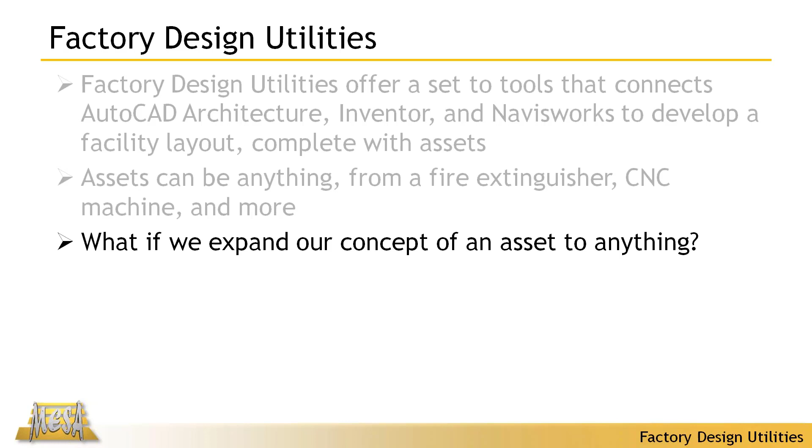So again, the assets can be pretty much anything. You're going to get your building, you're going to get your assets, which are pretty much everything else inside. And I've seen people, fire extinguishers, CNC machines, and more. But the main point of this topic is, what if we expand the concept of an asset to anything we could possibly imagine? Any product we make, anything, even a component of a product we make. So that asset may be a row of chairs in a concert hall, a checkout stand at a grocery store, shelves and racks in a retail location.

So lots of different ways, and it begins to make you think that the word factory doesn't really mean factory. And actually, one of the titles I was considering for this was unfactoring factory design utilities, because we're changing what a factory means in terms of that. And I've actually even heard other folks say that they feel that the product isn't really properly named because there's other ways to use these tools. That's one of the main reasons I want to share this topic with all of you, because you might be thinking, well, that's factory. I don't have to deal with the factory. But there are other ways that this can be helpful.

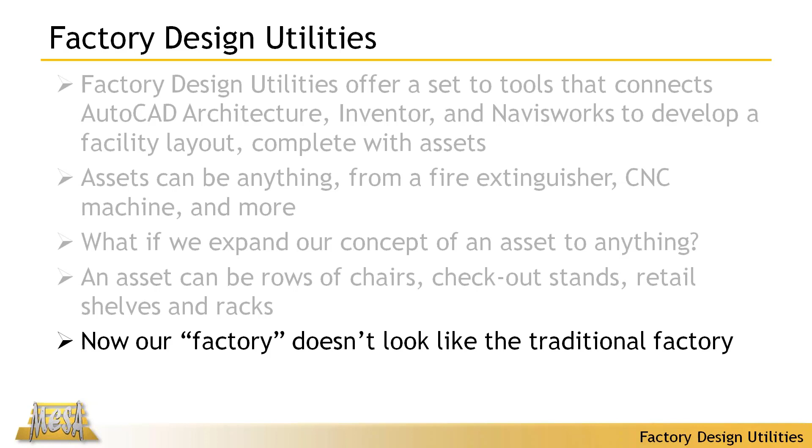So let's take a look at a couple non-factory examples. Event planning. If I'm going to be putting on the Winter Classic at Heinz Field, I've got to figure out how to put a hockey rink in the middle of the football field. There's all the equipment that goes into making the ice, all the pathways that the skaters and other people are going to want to use because they want to protect the field as best as possible.

So some sort of event like that, we could create the platform that the rink stands on as an asset. We can create the hockey rink itself as an asset. We can develop all those handrails and all those pathways and develop that.

When I thought of that, I also thought of, okay, well, PPG Paints Arena. They sometimes have concerts down on the arena floor. You've got to figure out where the sound booth is going to go. You've got to figure out where the rows of chairs are. You've got to figure out how many chairs you can fit on that arena floor. And so you want to know these things before you even begin selling tickets.

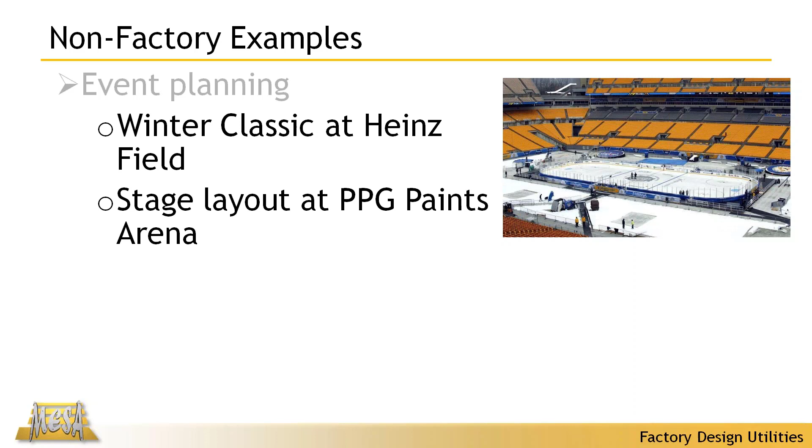So this type of layout, and maybe that even changes depending upon who's coming to town. PPG Paints Arena has Disney on Ice and those types of things coming as well. So each one of those requires a different layout. And Factory Design Utilities is actually a way to kind of figure out some of that stuff.

And then another one I thought of is laying out a retail space. We've got a building and we've got to figure out how the retail space is laid out. And this may not be something that most of you would think of, but this is another way to utilize these tools. And then one other one that was kind of way off the map, or maybe getting a little bit closer to what some of you would be doing, is the configuration.

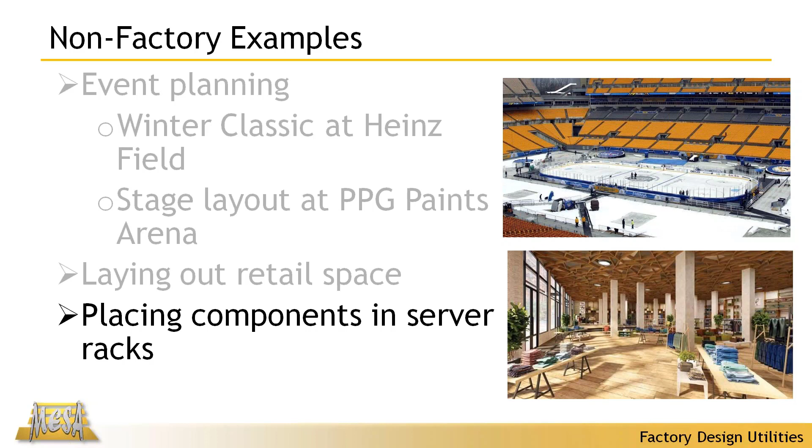Some of our customers out there make server racks, the cases that go into that. And some of them even supply, sell and make the components to go in there. I was thinking about how a server rack has so many slots, and you basically need to figure out how each one of those components fits in there, and some can take up 2 slots or 2 rows or 2 spaces, some take 3 or 4. So just even figuring out the spacing there is another possibility.

So let me do 2 demonstrations. I actually had one, and this one here is kind of a secondary one, but I thought it definitely demonstrates, but it doesn't really leverage all the tools. So I want to run through 2 here.

So the first one is, I like the idea of the Winter Classic. That really speaks to me as a hockey fan, and I know a lot of folks that are our customers are big hockey fans. So I wanted to incorporate this, and it was a very good example of event planning, a very non-traditional factory type setup. So I want to get into this one here.

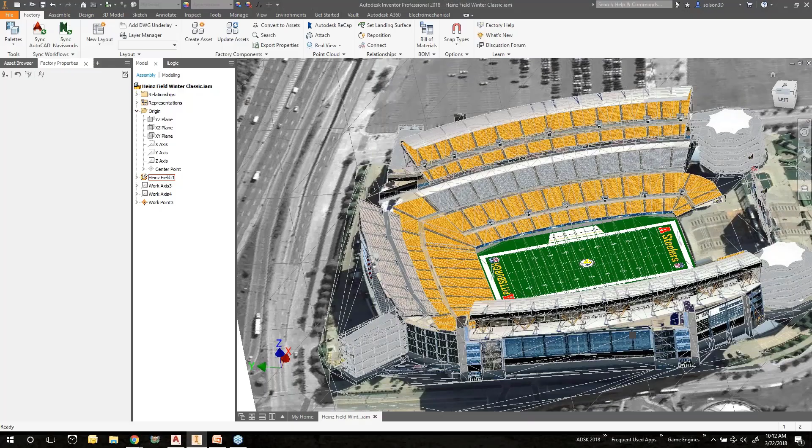So I downloaded off the web a model of Heinz Field. So don't think I did this. This is something I downloaded off the internet of Heinz Field. It even has some of the area around it. The Factory Design Utilities creates this big floor. Everything that we have has a landing surface, and by default, the landing surface is going to try to land on the floor.

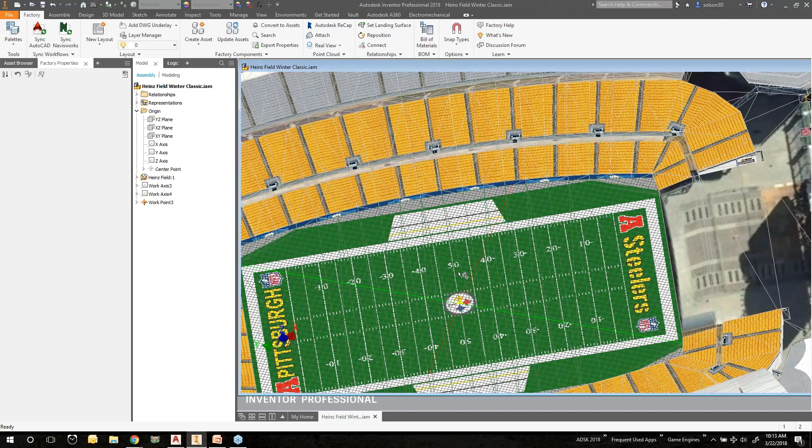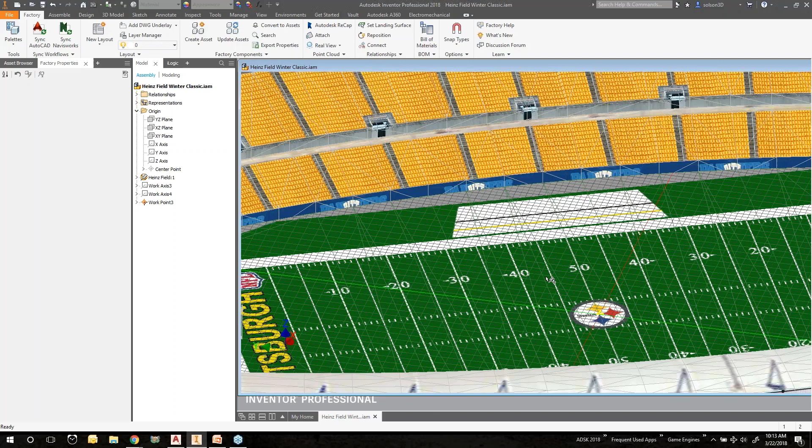So one of the things I had to do here is initially I had to push this model a little bit into the ground. That's why you're seeing the hillside come up out of it, because I actually have it just about 8 inches below that surface, because I wanted everything to land on the field, which wasn't the bottom of the model. So you can see I have my model here. What I'm going to do is go over to my asset browser.

So all these assets, some of them are system assets that are preloaded that come with the software that Autodesk creates, and they're very generic. Those work great in some scenarios, but in some scenarios we need to make up our own, so I have developed my own assets for this particular project.

In my event planning user assets, I have this block, which is the platform the rink would sit on. So I'm going to left click and drag that into the window, and go ahead and set this up.

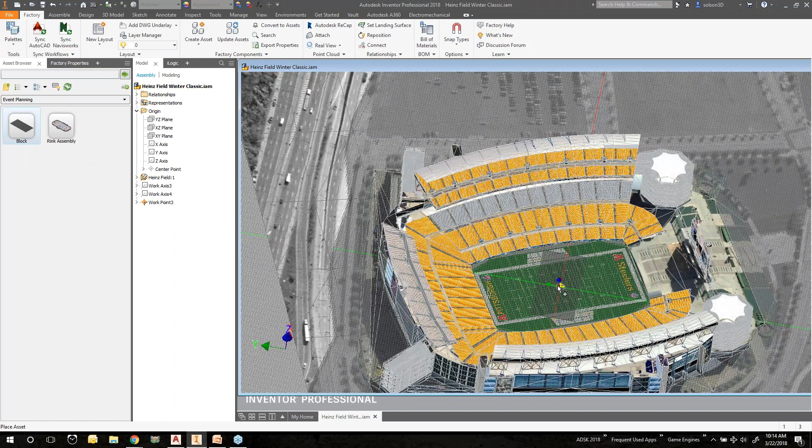On this origin point here, let me zoom in. So here's my origin and where I want that to sit. Once I place it, I'm going to get these coordinate systems here, just taking a few extra seconds to load that and create that. Once I have that placed, I can then position it.

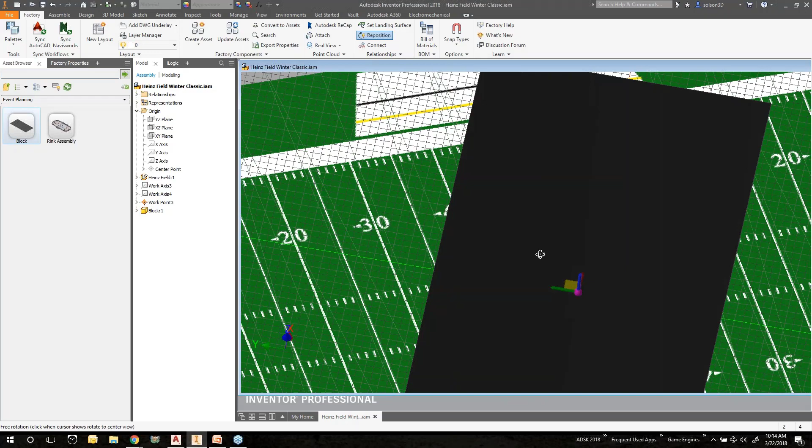It's going to by default land on the floor because it's an asset, and the assets have a floor definition in them. Obviously this is not the way I want the rink to be running, so this coordinate system here allows me to rotate or translate this object in one of those directions.

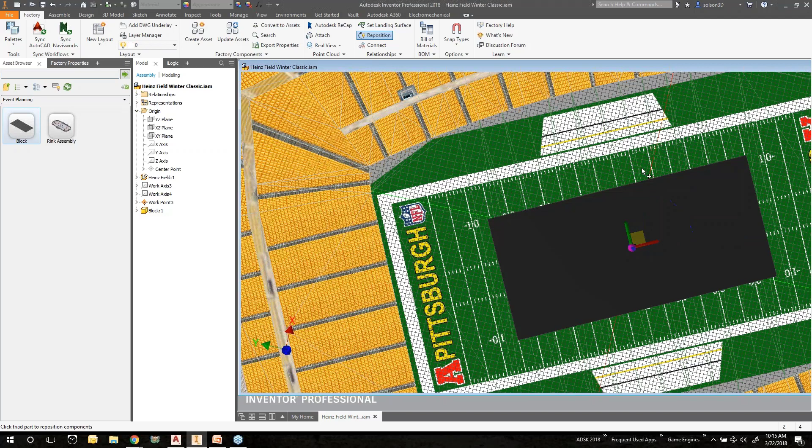Let me orbit this around here, try to get this thing kind of running parallel to the rest of the stadium here. Let me get this window maximized. There's a little bit of a pain in the butt there because that window wasn't quite maximized.

So now that I've got that, I'm going to right click and say done, and that asset is placed. So I've got that platform now in the middle of my field. Now I want to put the hockey rink there.

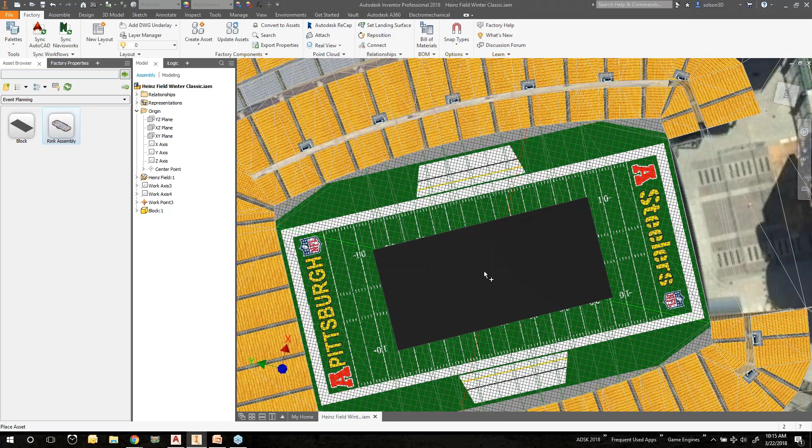So I'm going to bring the hockey rink in, left click and drag it into the window. It's going to have to generate the assets. That's what's taking a couple extra seconds, is creating a part file for me.

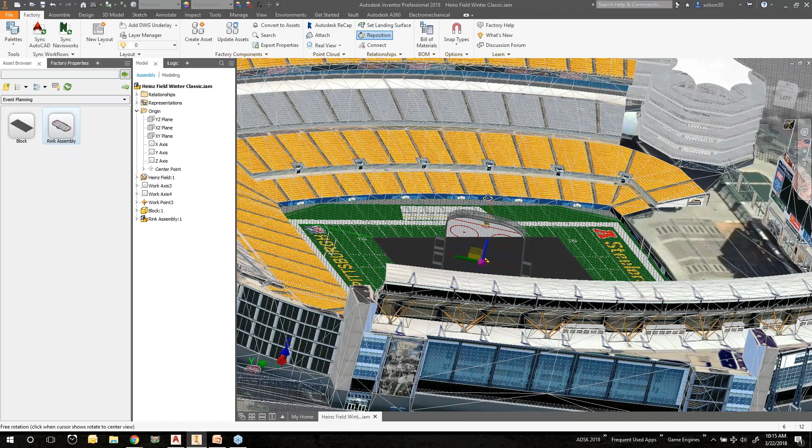I'm going to try to locate that center as best I can. Now, one thing I did on purpose here is the hockey rink's floor definition is going to have it land on the field, not on the platform. Not a big deal, that's where I can use these coordinate systems to grab this, and since I know I made the platform 12 inches tall, I just move it up 12 inches.

Now I obviously want to rotate it, so I'm going to rotate it and get to a top view here so I can see what I'm doing. What's on the left side right now is essentially the benches, and the right-hand side of the ice is the penalty box area. That looks like I've got it pretty well centered.

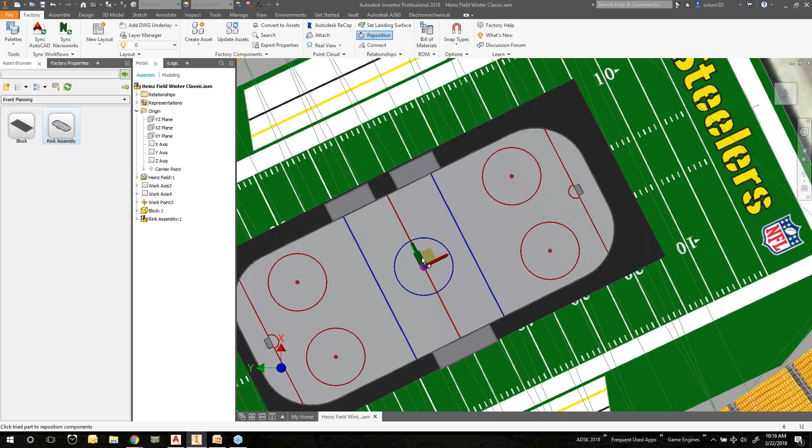If I wanted to, I could slide it in this axis just a little bit to make sure it's centered up. Realistically, that platform probably needs to be just a little bit bigger, but I kind of just left it as is for sake of what I'm doing. So there, I've right-clicked and now I'm done.

If this is really an event I'm planning for, I could start developing the handrails and the pathing and everything like that. I want to get to a different scenario though, to give you a better idea of how the tools are going to work in general. This is a good example, but I don't think it really sells or conveys all the tools here, so let me quickly save this and close it out.

All right, so I'm going to close this one. Actually, while that's working, I'm going to go over here to AutoCAD, because I want to show you the scenario I'm going to set up here.

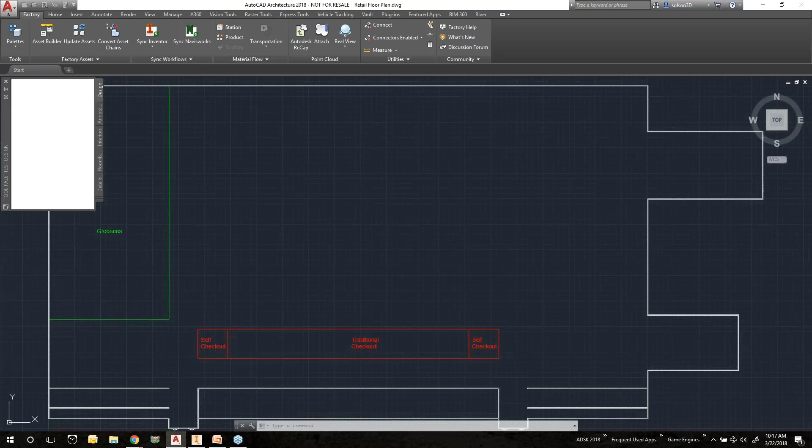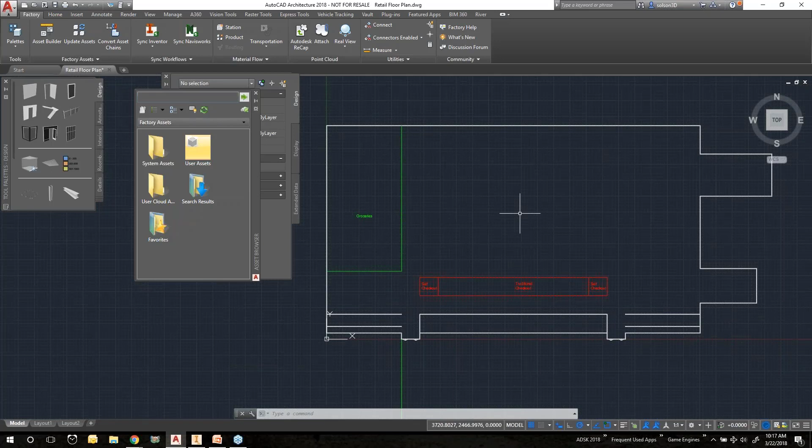In this scenario, I have a floor plan of a retail space, and I tried to find one online. I couldn't find one that really fit the way I wanted it to, so I created a very simplistic one here. This is a rough layout of what the local Walmart in my area looks like, probably the best retail space I could think of. You can see here I've got all the walls, I just threw a couple doors in there, and I have a self-checkout area that I want to lay out.

So this is an AutoCAD file, really nothing just yet, I just drew a bunch of lines and everything. I'm going to close this one out because I want to use this file as the basis of a layout in Inventor. So I'm going to stop right there, close that one out, and go back over to Inventor.

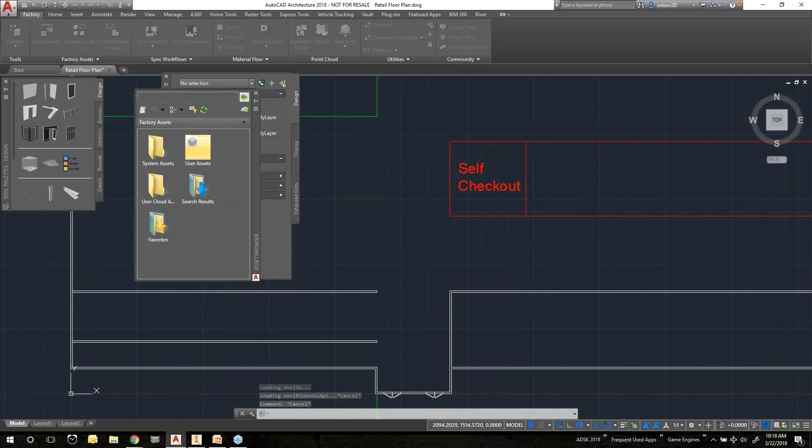I'll close this. So now here I have a Factory tab in AutoCAD. That's because I have installed the Factory Design Utilities, and you can see there's layout, create assets, projects, etc.

I'm going to go to new layout, and you can see I can create a new layout from an AutoCAD DWG. I'm going to do that. That's the file I just showed you, and I want this to be the basis of one of my layouts.

So I'm going to go into my workspace, find in my retail folder where I have that DWG set up, and go ahead and say open.

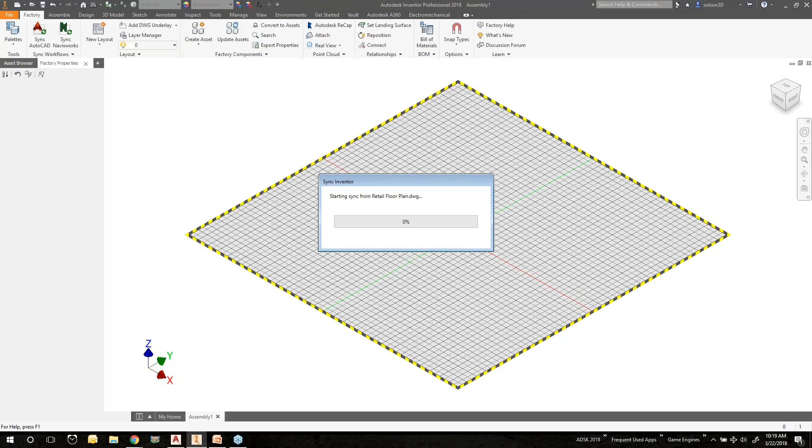So it's going to generate that DWG. It's actually going to create basically an assembly here for me. You can see at the top of the screen I'm getting Assembly1. It's building an assembly from my template, and it's going to bring that DWG in as essentially an underlay for me to work from. For some reason my machine always jumps back to AutoCAD once it's done, so now I have that. It's just really an AutoCAD drawing, nothing really special there.

So I want to bring in some assets and show you how these would work in a little bit more of an example that would be maybe a little more like a factory layout, while still sticking with our theme of not actually being a factory. So I have a retail set of assets here.

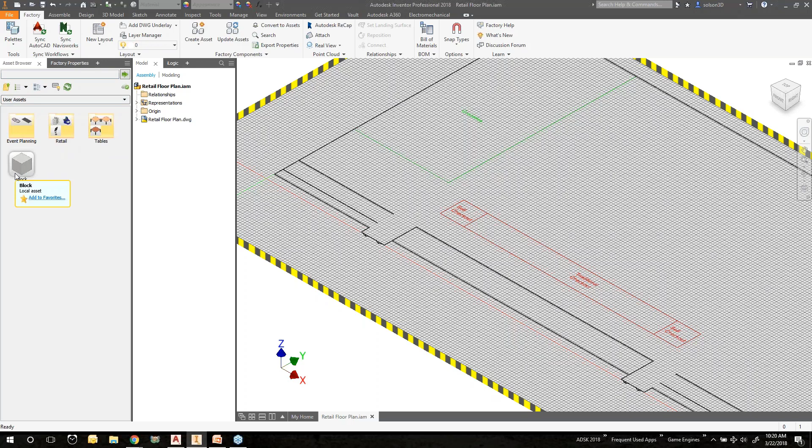Actually, I want to start with the regular system assets. I'm going to go back up here at the top and show you one of the system assets that would probably make sense here. I want to go to the safety equipment folder and put some guardrail around my self-checkout area, to create some fencing to keep the customers flowing through this area in the proper way.

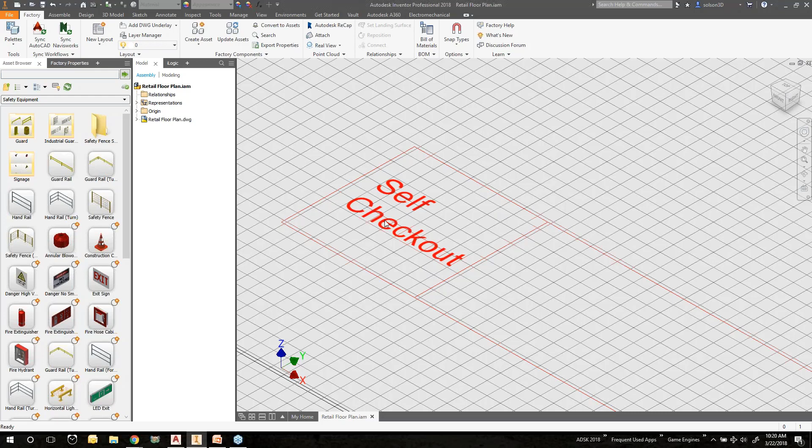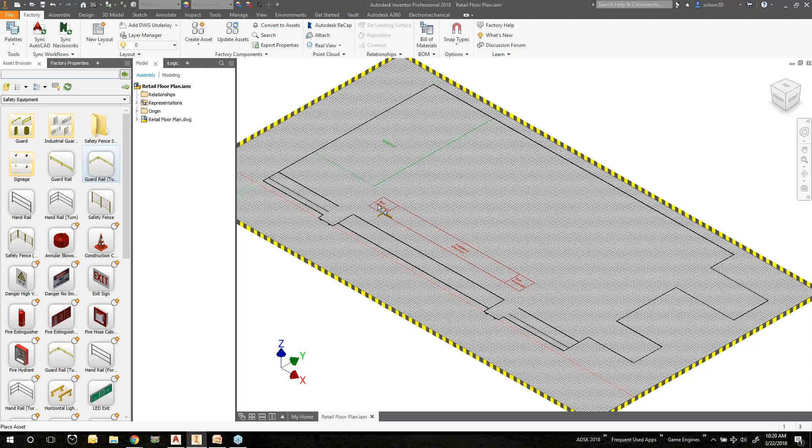So I'm going to grab this angled guardrail, left click and drag it into my window, and snap it to this AutoCAD file. It's going to want to rotate, so I'll allow it to rotate. I'll grab that arrowhead so I can rotate it 180 degrees, and right click and say done.

So you might be thinking, okay, that's great, but now do I need to put more in there, another section or whatnot? I don't necessarily need to. One of the great things about a lot of these assets is they can be left with key parameters that I can edit on placement, or I can make it more like an iPart with different configurations that I can drop in.

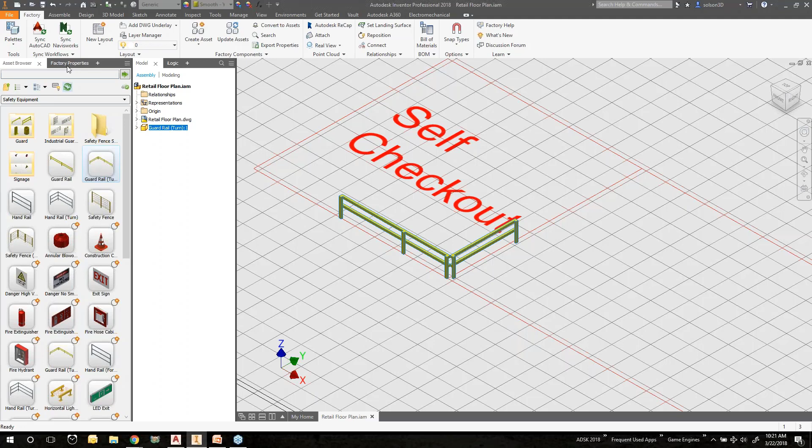So in this example, if I pick on this fence and go to my Factory Properties tab, you'll see that I've got an angle, a height, a length, and a turn length. The turn length is basically this leg over here. So I'm going to go ahead and change this parameter to 360 inches, or 30 feet, and you'll see that this leg over here will change.

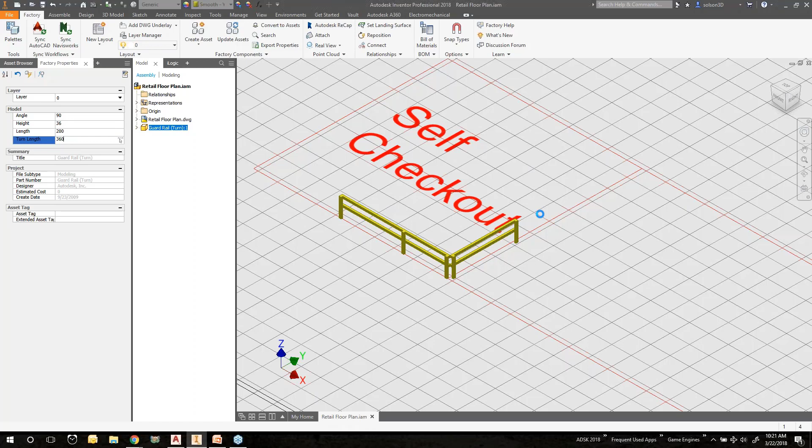Just taking a few extra seconds here, my machine must be working slow for me today. So there you can see it stretched that out, and there I have that occurrence.

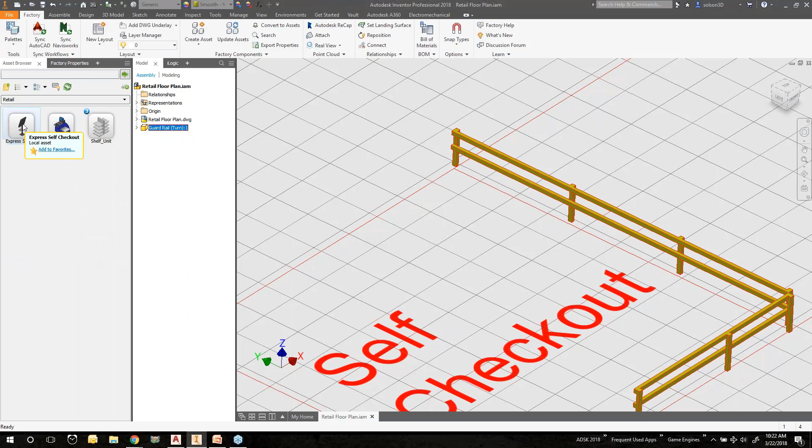So what I want to do next is bring in one of my authored assets. I'm going to go into my user assets, and I have some retail ones. I've noticed that a lot of self-checkouts now have more of a kiosk than the old setup, so I modeled up one of each. I'm going to go ahead and bring this express self-checkout into my model.

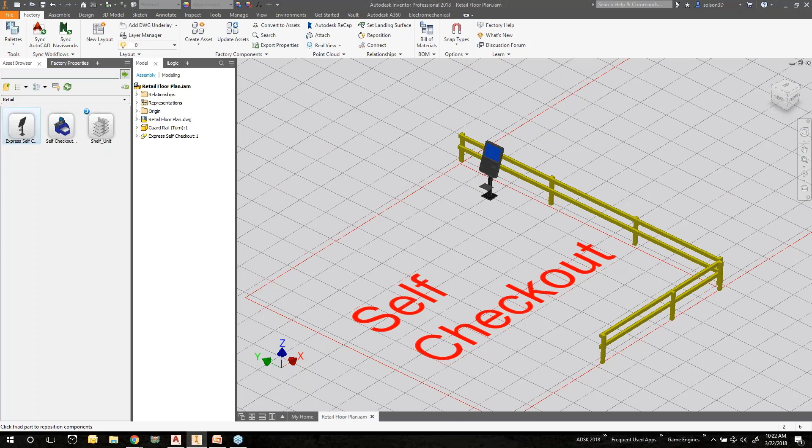I'm going to drop it right about there. I'll right click on that and tell it I'm done placing that one, and place another one, giving it some space. Actually, I'm going to leave these intentionally offset too, just for a purpose here.

So I want to show you that if I have those kind of offset like that, I can actually align them underneath this Relationships folder. I have an Align command, and it lets me pick components that I want to align to a reference component. I'll tell it to use this alignment position here, and you'll see it'll slide that object back, and now they're both aligned.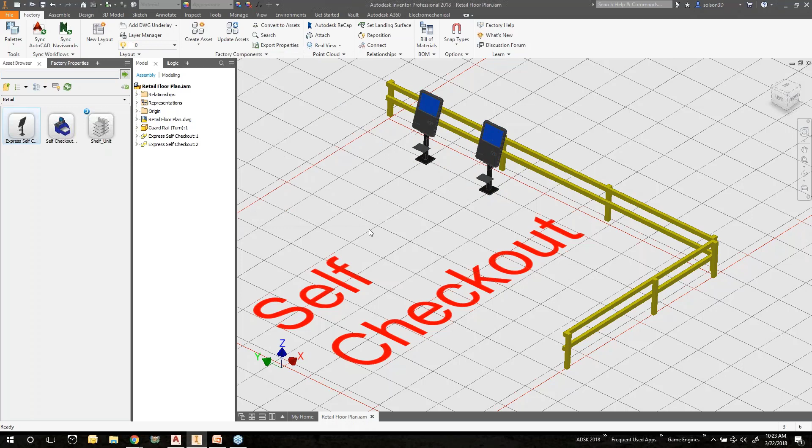So real quickly, that was real simple, I just threw the object in there. Let's take a quick peek at how something gets authored before I throw any more assets in here. So I'm going to go ahead and open up a model of a different checkout stand.

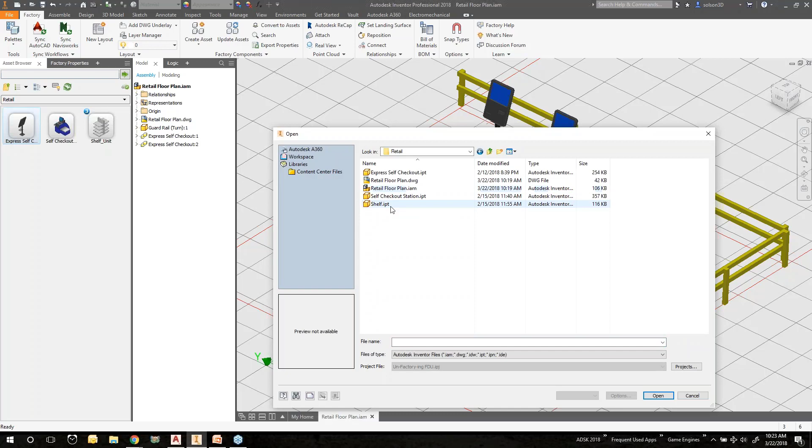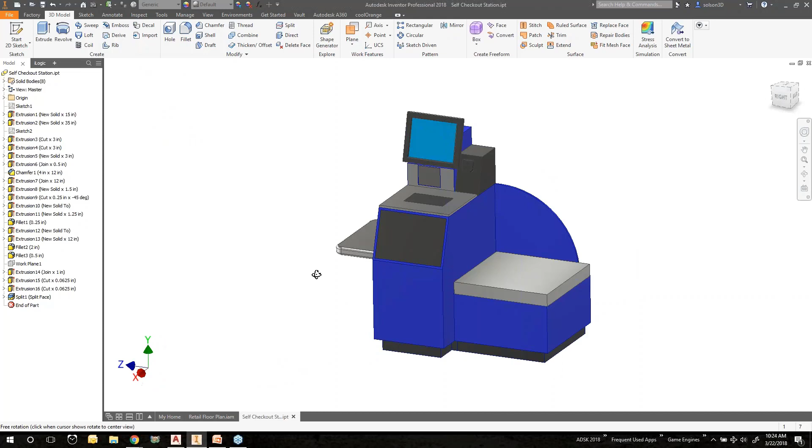So I have a little bit more of a bigger checkout station, not so much the express version. Here it is, it's just a multi-body part. There's really nothing special here. I kind of modeled it up as a multi-body part just by looking at reference images. I don't really have any real dimensions, I kind of just made something up here.

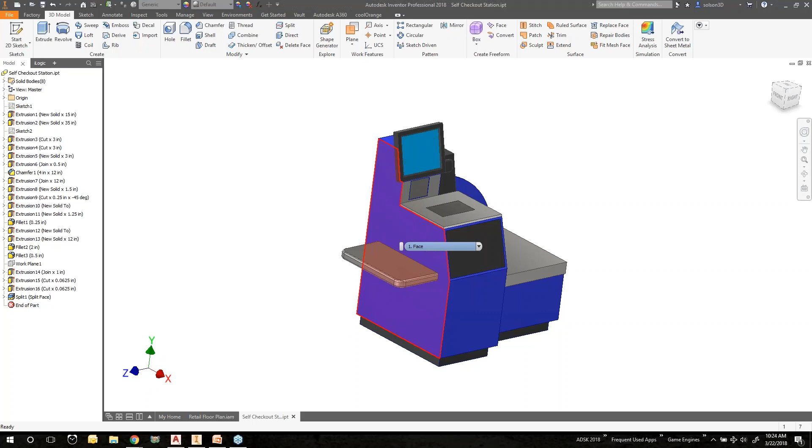But if I had some assembly, I could derive this or shrink wrap this into a simplified part that I could then use as the asset. You really could use the entire assembly as an asset, but it feels like the perfect opportunity to derive it into a shrink wrap, or just a regular derive, to make it a little bit lighter weight part for us to work with.

But what I have here is my multi-body part that I kind of made up. I'm going to go to the Factory tab here, and I can go into what they call the asset builder.

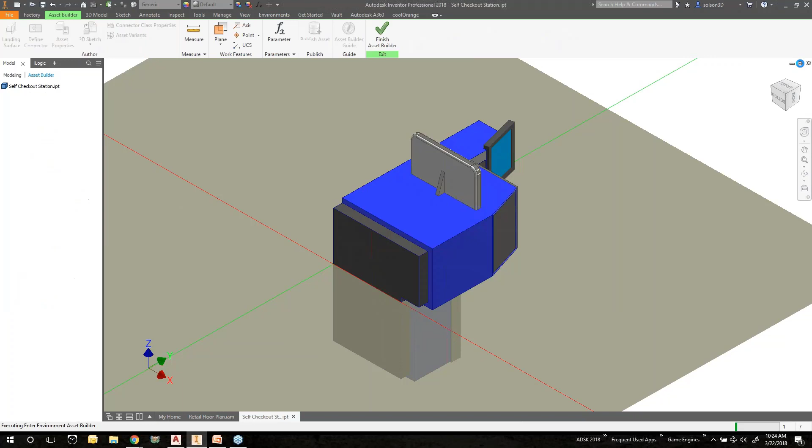So it kind of is laying it in here. You can see like it fell on its side here. And this gray landing area is basically what it's going to call its landing surface. So I don't know if you've caught this before, but in the Autodesk world you kind of work the ribbon left to right, so they built these commands. I want to start by defining my landing surface.

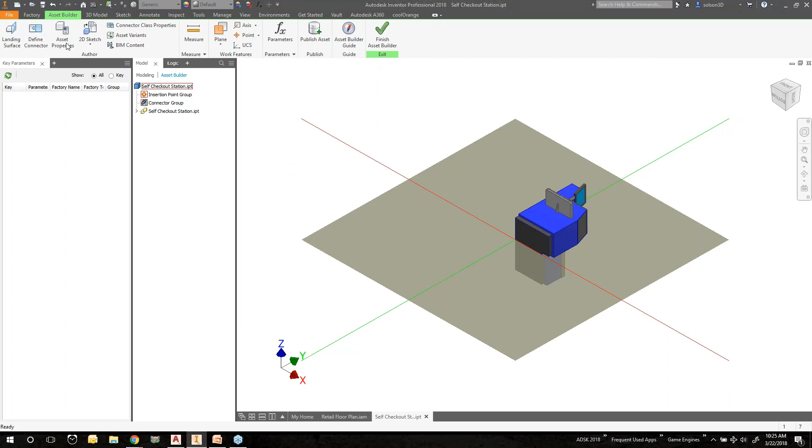So I'm going to go to my landing surface. I basically just need to pick a face that I want to be landing on that landing surface. And I can also pick an insertion point. So I'm going to go to my insertion point, click on here, and that looks pretty good. There's some other options for showing the coordinates or preview, I don't need to do that.

Now, one thing I'll point out here is with that hockey rink, I could have offset it or told it that its landing surface was a foot below its bottom face. But I kind of left it like that to prove a way that would work. It'd probably be more intelligent for me to set it up so it would land on the ground a foot up, so it was landing on my platform. Just another idea there.

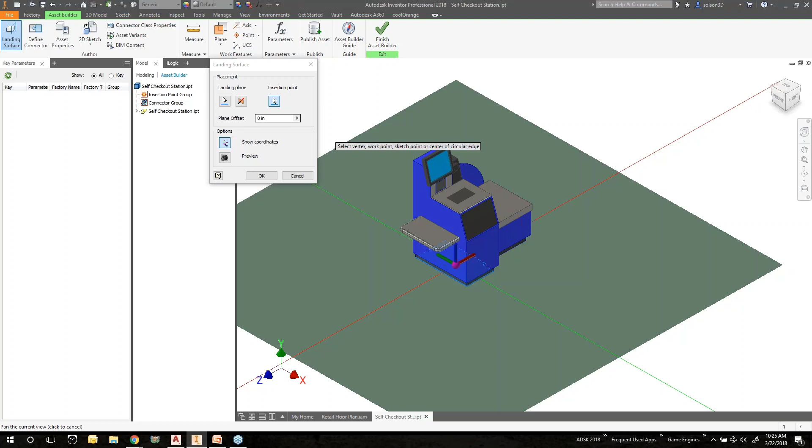So now I could go into my define connectors, and that's different types of geometry that I can use, say if I have a conveyor belt and I want to link section 1 to section 2 and have some sort of connection, have things pop together, I could do that. I'll show you that with my next asset.

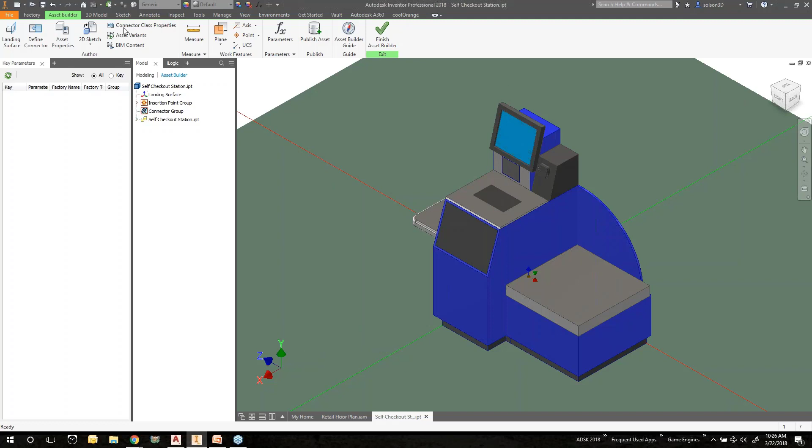The asset properties is a way that I could pre-populate a lot of the iProperties for this asset, which again is an option, but I'm not going to do that in this case. There's some other things here we'll dig into in just a moment with the connector, class properties, and the asset variants. I'll show you that in my next example.

I'm just going to jump all the way over here to the publish asset. So it wants me to save it because I added the landing surface and the insertion point. Now it's going to open up this asset publisher. You can see here, destination is where I want to have it saved, and what name do I want to give it. I'm going to give it today's date, which would be 3-22.

I want it to go to my retail assets. An asset type: standard, pit, or platform. Is it going to go standard on the ground? Is it going to be below it in some sort of pit? Or is it going to land on some sort of platform above the ground?

My 3D options, I could simplify it and then pick some sort of coarse, medium, or custom. I kind of just usually, in this case, since I made a multi-body part that's somewhat simplified, I don't feel that I need to do that.

I could also tell it to generate the Navisworks model. The idea here is Navisworks is part of this suite, so if I wanted to have it generate the cache file that's referenced by the Navisworks model, I could do that now, or let it do it whenever I take this over to Navisworks. It's not going to matter a whole lot in this scenario, so I'm just going to leave it as is. I'm going to go to my 2D options.

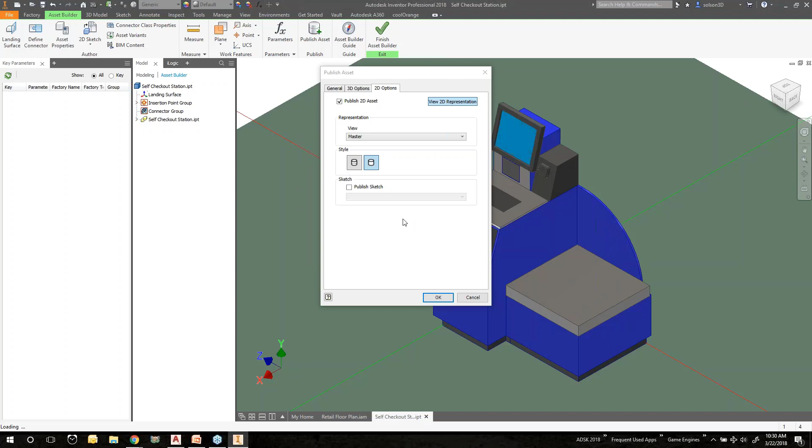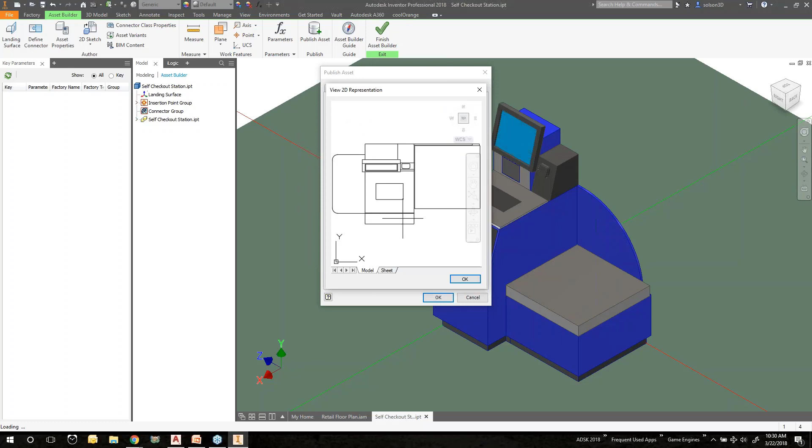And like I said, when I go into an Inventor model, I can place the 3D asset, and there we finally go. It took a little bit longer than normal, but you can see there's the 2D representation. Personally I like being able to drop a 2D representation, and when I go to Inventor, it knows where to put the 3D and vice versa. So I'm gonna say okay to this. I'm gonna tell it to publish this asset then. It's gonna take just a few seconds.

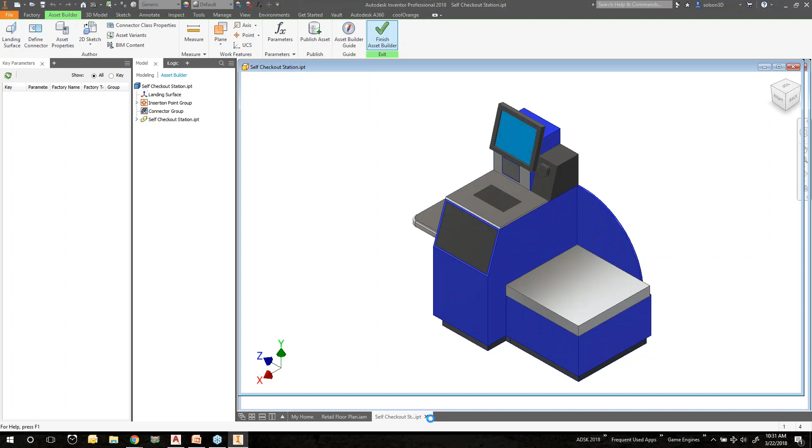Okay, so now I have that. I'm going to close this. I'm going to tell it to finish the asset builder and close this file. So here I am back in my layout. I'm going to go to my asset browser, and underneath my user assets, under my retail, I now have the one I just populated. I created one the other day in case this one failed, and that's why I have two of them there.

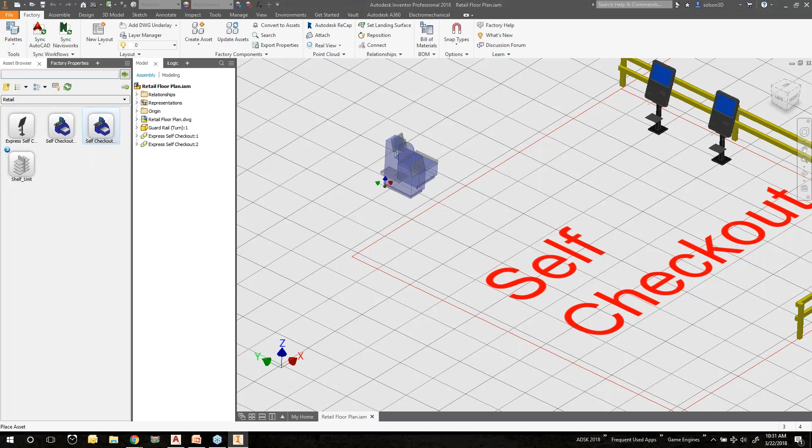But I'm going to go ahead and just drag and drop this one in here. Let's say I want to drop it right about there. And I'll just drop one of those for right now. I don't need to drop any more than that. So I'll right click and say done. And now I have that one. I'll get rid of this other one.

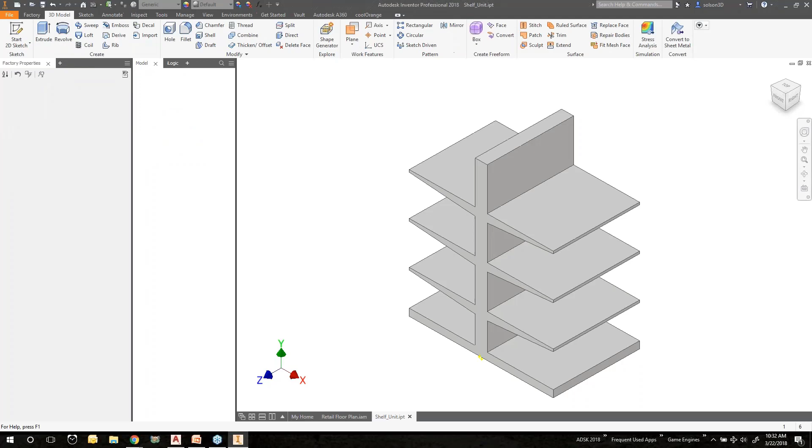Before I do the next one, I want to show you this shelving unit has a few variations to it and a couple things that are different. So I'm going to tell it to edit this one so you can see a couple things special about this one. In this case, I've already defined the landing surface. I've actually already defined a connector. You can see that's what this green dot in this coordinate system is, and there's one on the other side. In a shelving unit, I might have to set up row upon row and get things to connect with each other.

You see I have some key parameters here as well: the depth of the shelf, the height of the overall unit, and the width being how wide the unit is in general. If I go to these asset variants, what I have here is essentially like an iPart where I've picked up the width and added it to a table, and I have a 3 foot, a 4 foot, and a 5 foot width. If I hit this little plus mark here, it'll let me add a 6 foot shelf, and I can say this would be 72 inches.

And say okay. So now it's that simple to just add another variation. Again, I could have multiple different values, but in this scenario, I thought it would be best to just have that one. The connector class properties, there's all kinds of different ones. I actually created one specifically for this, and it's all about understanding the properties that each one should have, and if there's anything that's going to be shared between multiple occurrences.

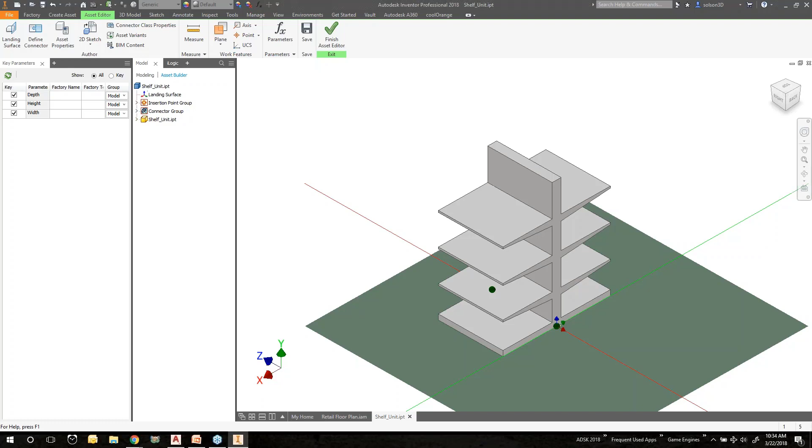But again, there's all kinds of preset ones. And again, a lot of them are set up for a real factory type setup. I'm going to go ahead and tell it to finish the asset editor. It's going to want to save the changes. And to a certain extent here, it's going to kind of just rerun through those settings that I had before. So I'm going to go ahead and say OK. So basically, it's republishing this asset.

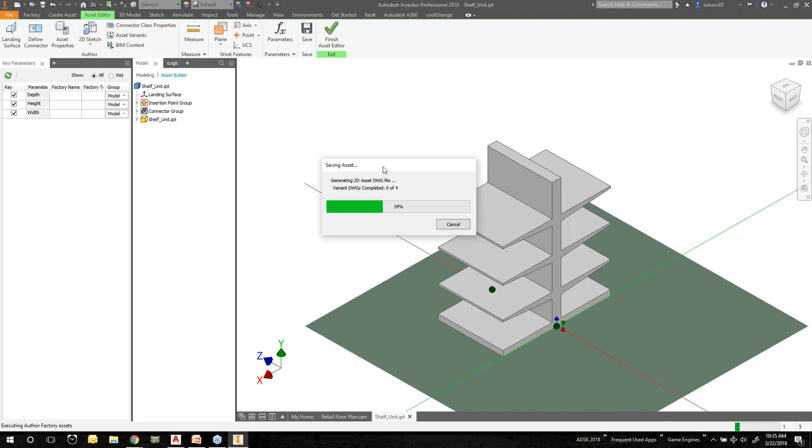So what I'm going to do here, once this is done, I'm going to go into the grocery area and place a couple of these. Now I want to close the loop here. I want to go to AutoCAD and show you what this model would look like in AutoCAD, place a couple assets, and then come back to Inventor and show you how that gets all refreshed. So that's kind of where we're headed with this one. So just bear with me here a second. It is kind of populating these assets here, taking a few extra seconds for me. So just bear with me here a moment.

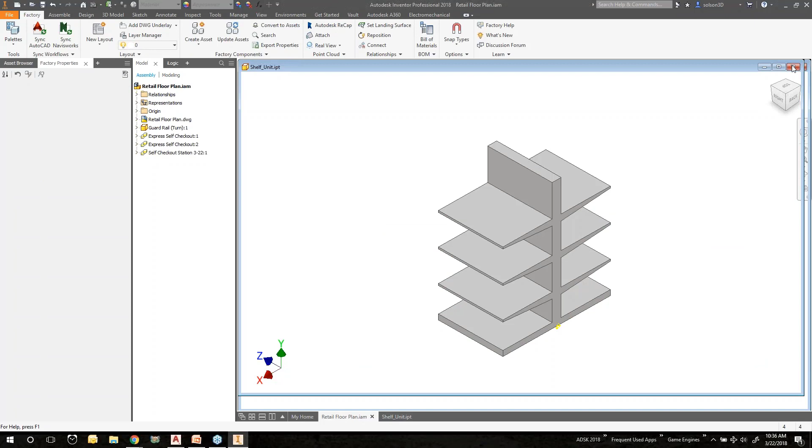So I'm going to go ahead and close this file. And so now I'm back over to my model. Give it a second here, I guess.

One of the things that I'll get to show you here once I finally get back to AutoCAD, and kind of just help you understand all the pieces while I'm sitting on my machine here, is Inventor is really where we can develop assets. We could do that in AutoCAD too. It's either or. If you have things in AutoCAD and you don't have Inventor, you could develop those assets in either location and kind of get those space claims created.

One of the reasons we have AutoCAD, and actually I think this is interesting, I didn't quite catch this when I first got into this, was that it's actually not just AutoCAD; it's AutoCAD Architecture. And the reason that it's AutoCAD Architecture is the fact that I will then be able to put some doors and windows, etc., in my model. So that's where I'm going to be able to easily add architectural type elements to my building layout.

So once we get there, I can show you all these things. It's just taking its sweet old time to worry about something. I'm not sure what it is at this point. I'm very sorry that it's delayed.

One of the reasons I haven't gone over to AutoCAD yet is, again, it will allow me to sync up. And I would jump over to AutoCAD at this point to show you those workflows, but I don't have the AutoCAD file yet because I haven't generated it yet. Yes, I do have that floor plan, but it's not really connected to this file.

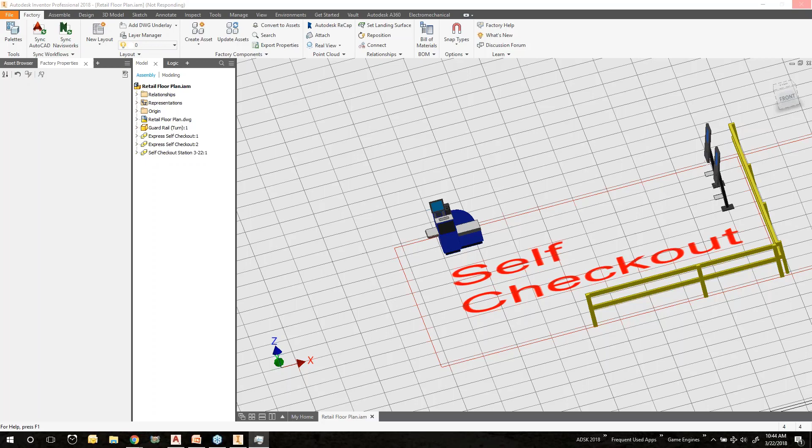It's almost getting me to the point where I feel like I'd almost be better shutting it down, or not shutting it down, but at least stopping this and coming back to Inventor and getting caught up quickly. I think I might try that real quick. Let me see if I can close Inventor so I can get started on it again.

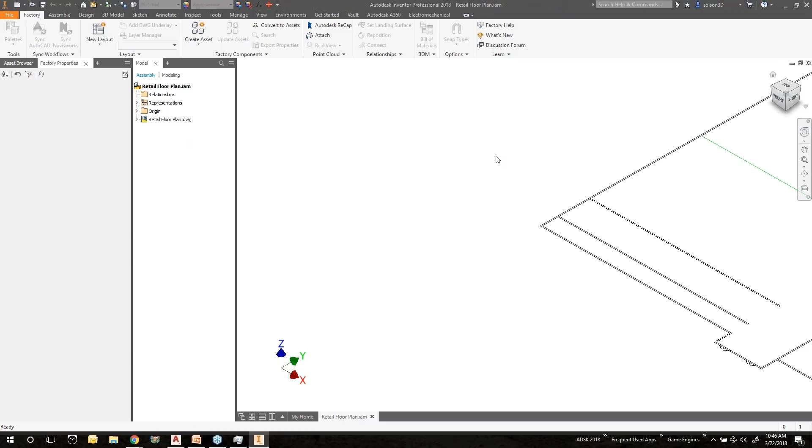So you can see it does have that retail floor plan set up there. Let me just open it up again. I'll throw a couple of those assets in so we can sync to AutoCAD in just a moment. Okay, so I probably don't have those assets in there. I'll throw the shelving unit in, and then when I get to AutoCAD, I'll show you a couple things, and then I'll get those to sync up.

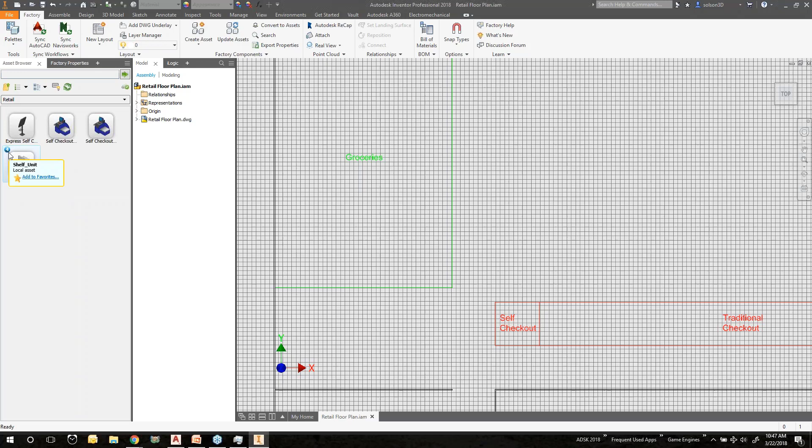So here is my floor plan again. It doesn't have those assets, but I'll throw the shelving unit in, and then when I get to AutoCAD, I wanted to place some components from there too. So let me go to my user assets, my retail, my shelving units. Notice that there's a 4 here. That 4 represents that I have 4 variations of that asset. So I'll click and drag and bring that into my design.

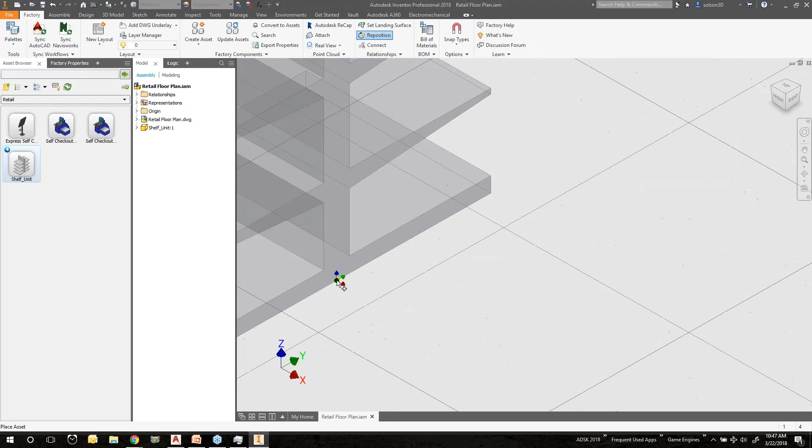So there is my shelving unit. I'm going to go ahead and drop one. Now that it's dropped one, I can say done with that. And it'll ask to place another one, and this is where the connectors show up. You can see I've got those green dots showing open connectors. As I get close to this model with this one, you'll see a little yellow line connecting them, and I'll bring them together and they'll snap in there.

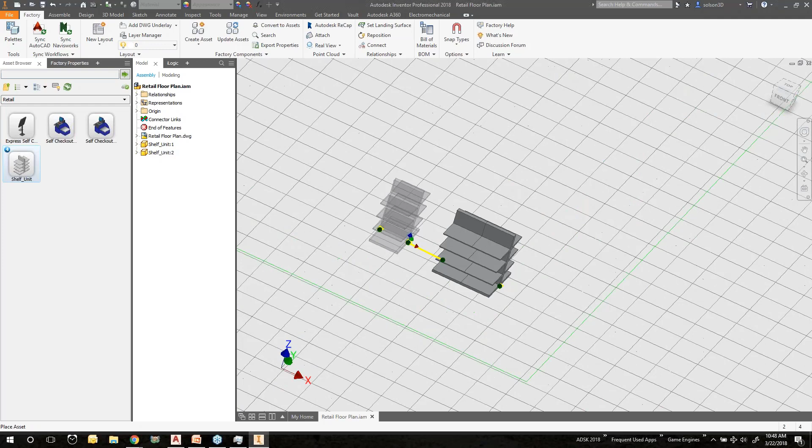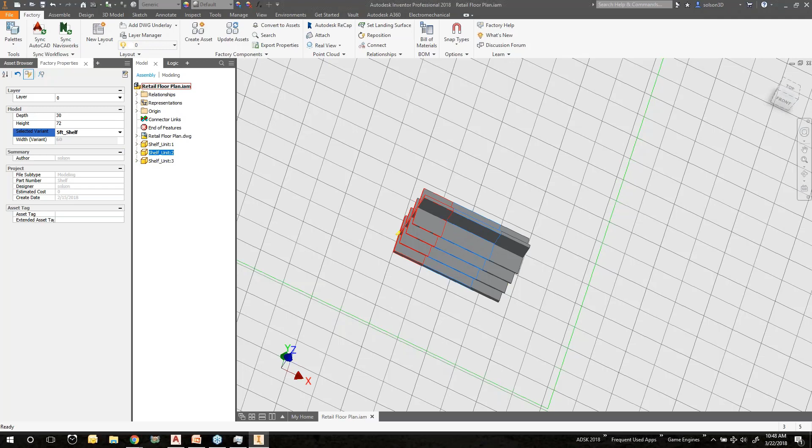I'll drop that one, and I'll drop one more just for the sake of doing that. So now, real quickly, I have variations of those. When I placed that one, it left the default one in there. But if I go to my factory properties, you can see I have a select variation or variant. I can pick and make that a 5-foot shelf. Then I'll tell it to update, and it will make that one the right width.

So let me quickly save this. I'll go over to AutoCAD and place some of those assets too, so you can see that. If I save this, I'll sync to AutoCAD. Like I was saying before, it's going to generate that AutoCAD file for us, and once it's generated, it will offer to open it up for us, and I'll let it do that.

One thing I will tell folks: when you do that sync, the two applications don't like it if the other file is open. So when I go to AutoCAD and open this up, I'm going to want to come back to Inventor and close down the Inventor model, because if I go to sync them and that file is open, it will give me grief. You can see it's now saying, I made this file, do you want to open it now? Yes, I would like to do that.

So I'm going to go over to AutoCAD. When I get into AutoCAD, you'll see that I already have those shelving units there because I placed those as assets. Let me throw a couple more assets in here, and I'll show you a little bit of how the architecture element works, and then we'll jump back to Inventor and wrap up.

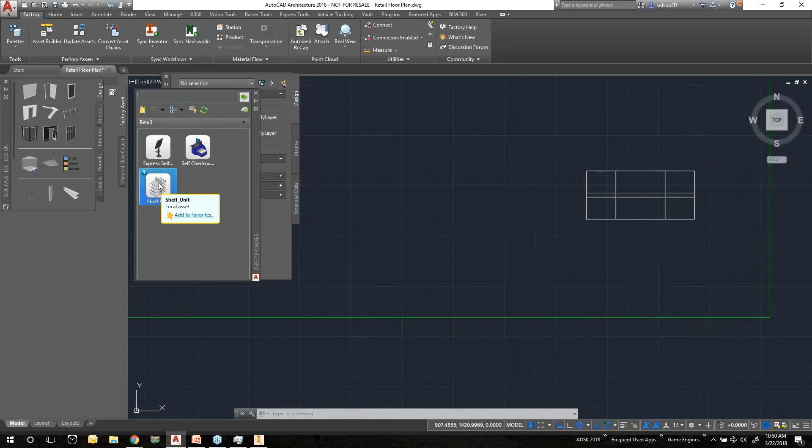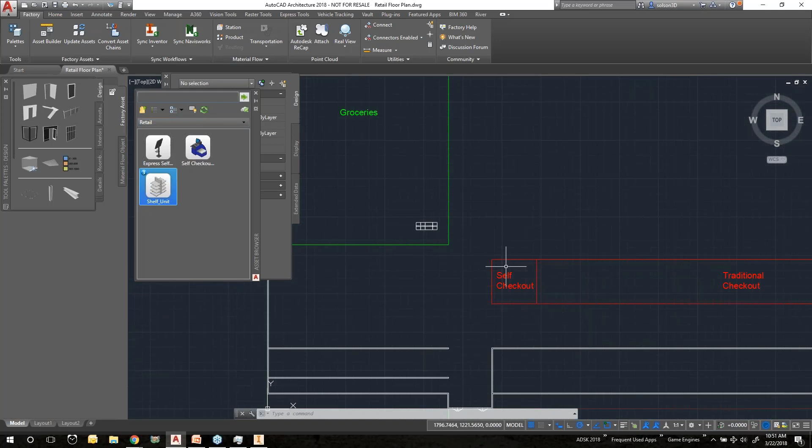So I'm going to drag one of these variations in. I tried to double click on it and then drag it in, so the software wasn't too happy with that. You can see I'm getting the connectors. I'll connect those together. If I go to my express self checkouts, I'll drag one of these in. I can place one of those and spin it. I'll go to one of these.

Actually, one of the things about this is I have to refresh, because I created one in Inventor that populated a new one. I do need to refresh to see that secondary one. The one I saw there was the one I created previously. So I'm going to left click and drag one of these in.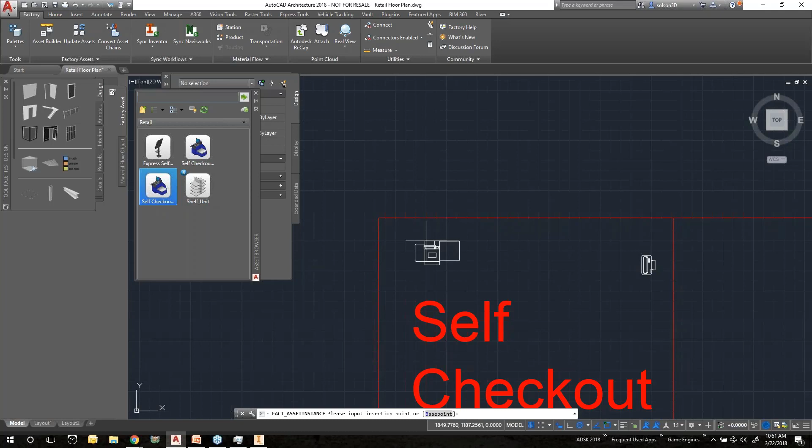Yep, I keep getting a little ahead of myself here. Let me get out of that last one. And I can drop one of these in as well. I can spin it.

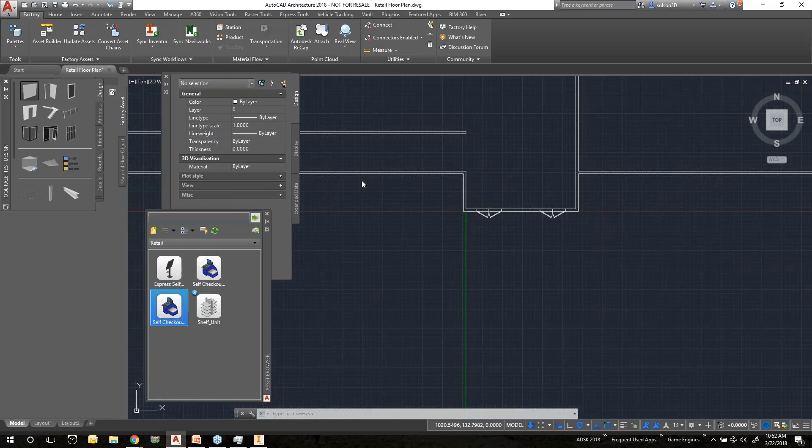All right. So let me just real quickly show you some of the architecture elements here. I'm going to close or just move away my asset browser. So in AutoCAD Architecture, we have things that will create walls and doors and windows. I'm just going to quickly create like 3 walls. I'll throw a couple doors in them so you can see that element, and then we'll sync back up to Inventor. So I'm going to pick on the wall command.

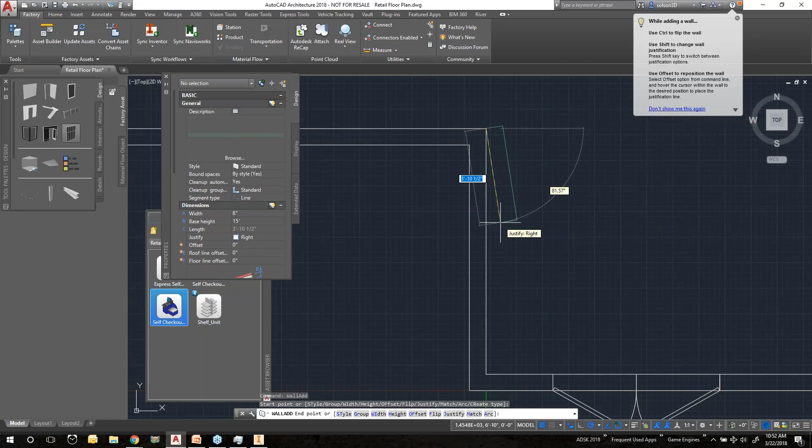The properties dialog box is going to allow me to say how thick is the wall, how tall is the wall, and add some other elements to it. I'm going to zoom in here, and basically drawing a wall is like drawing a line. So I'm going to pick this corner here. You can see it's kind of creating a wall. It's on the wrong side though, so I'm going to hit Control. Control will flip the wall to the other direction. And it does that, and I'm going to zoom in here and get this intersection right here.

And then I'm going to come this way. The wall's going on the wrong side of my line. I'll flip it over. Come to this intersection. And I'll come up to there. All right, so now I just want to throw 2 doors in there. I have a couple double doors on the end.

When I pick the door command over here, it's going to show me, oh, it's a single door. But I can hit this browse, and it'll open up another tool palette or a catalog where I can pick a different type of door. And I want to use a double door. So I'll double click on double door here. It'll change this one over here so I can close this catalog. The door wants to know a wall to fit in, so I have to hit this wall.

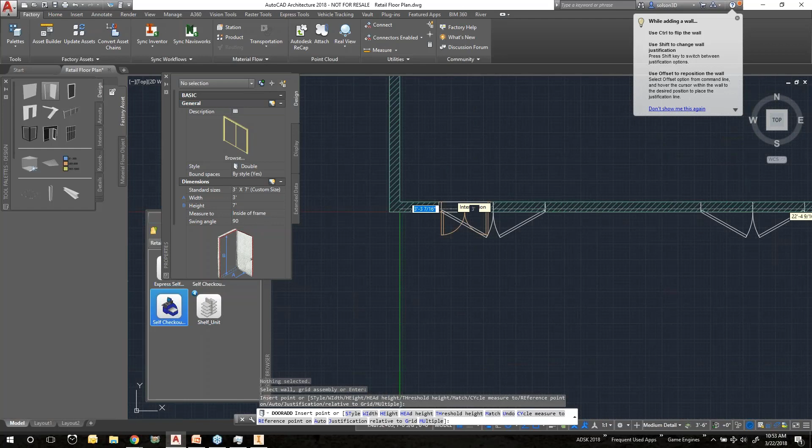And you can see it's starting to show me a door. And because I have the floor plan underneath it, I can actually snap into some of that geometry. So there's one door there. I'll come over to this intersection here, get this door there. And if I zoom out, you'll see, well, Steve, those doors are not the right size for what we had. Well, AutoCAD Architecture has different sizes of doors.

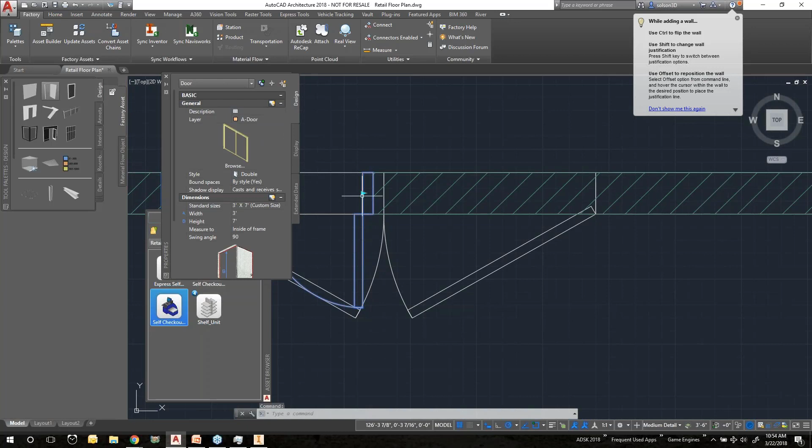So if I can click on, let me get out of the command I'm in and click on that door, it will let me resize it. And you'll see that I get little tick marks here. Once I click this arrowhead, I get little tick marks showing me standard sizes. So I'll pick a standard size for that one, come over to this one, do standard size for this one.

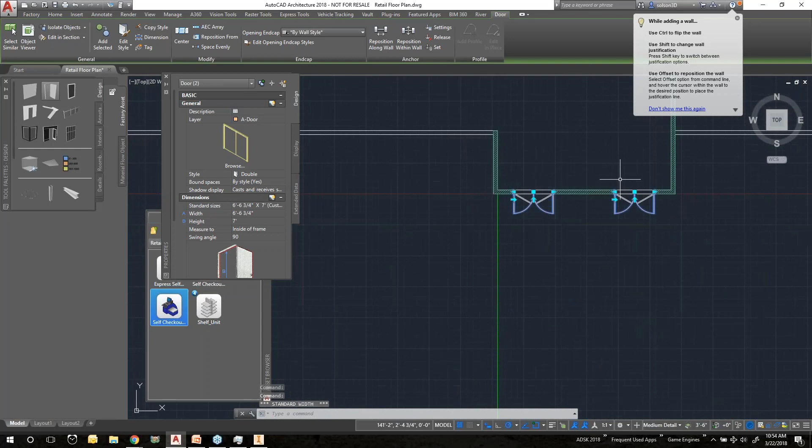All right, so now I've got my walls in there. And again, that's the purpose of AutoCAD Architecture being in the Factory Design Utilities. It gives me the ability to create this facility with these specialized tools. So I'm going to save this one. I'm going to tell it to sync to Inventor. So it wants me to save this. That's fine.

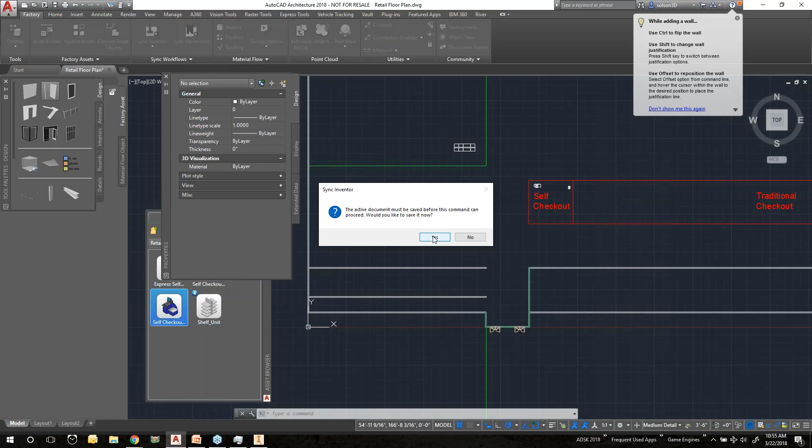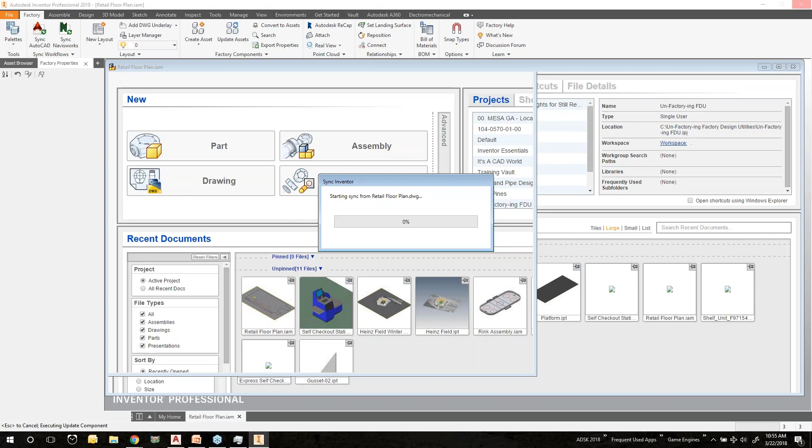Now, when I do this, it'll save it and also want to close this file to open into Inventor. Unfortunately, Inventor doesn't offer to close it when I sync, and it offers to open it up in Inventor. So just one more second here to open this one up, and then you'll see how I'll actually have 3D versions of those checkout stands that I put in, and I'll also have 4 shelving units versus the 3 that I had placed when I was in Inventor.

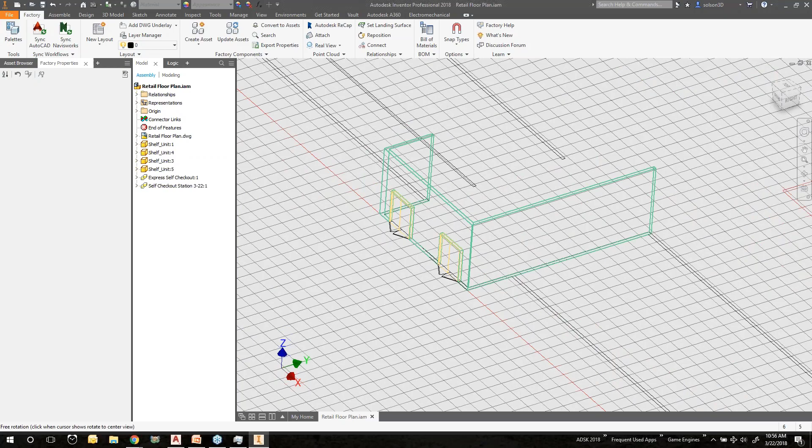So if I zoom in here, you can even see my walls and my doors. There are the 2 checkout units I placed. And if I zoom in here, now I have 4 shelving units versus the 3. So let's just go and wrap this up here because that's what I wanted to show you.

So there is a popular commercial out there. What is your mountain or hill that you're climbing? So I'll say, what's your factory? With Factory Design Utilities, I think I've shown it's not really a factory, or it doesn't have to apply solely to a factory. So what's the factory that you're dealing with? What are you trying to work with? And again, it could be some sort of configuration, it could be some sort of other way.

If you have equipment that fits together in a very specific way, or in a chain, we can use some of those customized connectors to get them to snap together and give you a layout. Now, all this can go into creating Inventor DWGs or IDWs. I didn't take it to that step, but all those things are available.

The reason Navisworks is part of the Factory Design Utilities is we could have models from all kinds of different CAD sources, and that's one of the things that Navisworks can do: it can aggregate all that data into one model, and you can do some clash detections. Certain versions of Navisworks have a timeliner, so you could plan a remodeling phase over a couple of different things.

So there's lots of different elements to Navisworks. It also can do some visualization. So there are some reasons there. I didn't want to spend time on that because it's not really what I was trying to illustrate here.